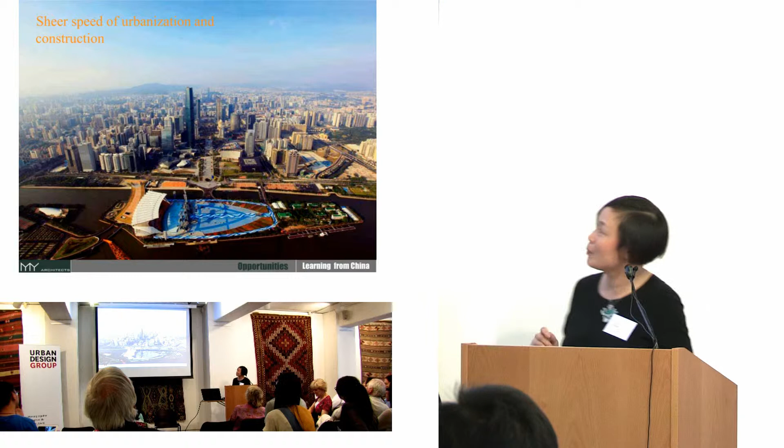The Chinese built their towns with extraordinary speed. This is the new town in Guangzhou. Imagine there's nothing there 10 years ago. Now everything has happened. There's a central district with skyscrapers, an opera house, a city museum, and the central libraries.

Before I talk about the planning process, I will mention two fundamental differences in China. The first one is land ownership, because in China most of the land was owned by the state, and a very small portion owned collectively. The land users only have a right to use the land, not own the land. This is very different. For instance, for residential development it's only 70 years, but other uses are only 40 to 50 years.

The second one is the decision maker. Because of the land ownership, you'll find in most cases it's the government that plays a very important role in terms of project decision making.

There are three planning policies at different levels. The first one is a regional plan. It deals with the strategic vision on a very large regional basis. The second one is a strategic master plan, normally for a small city, a town, or even a district in a metropolitan area. The third one is called the regulatory plan.

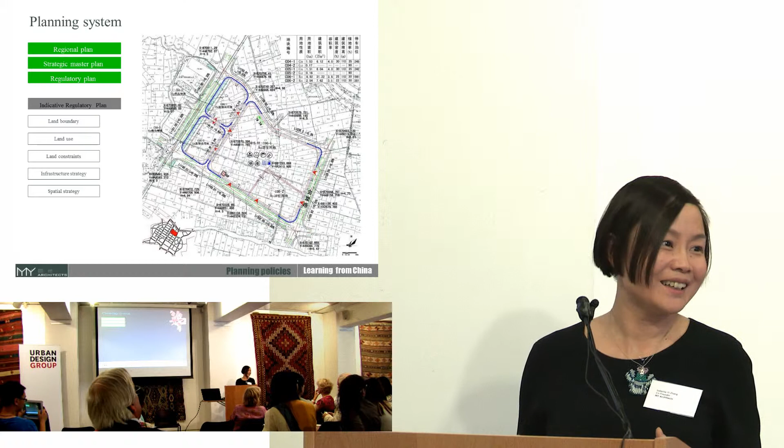It's very different in terms of how planners work here. Here in the UK, architects will do a context study and then test the land. But in China, the plan is set up in very detailed terms. This forms a development guidance for the following design projects.

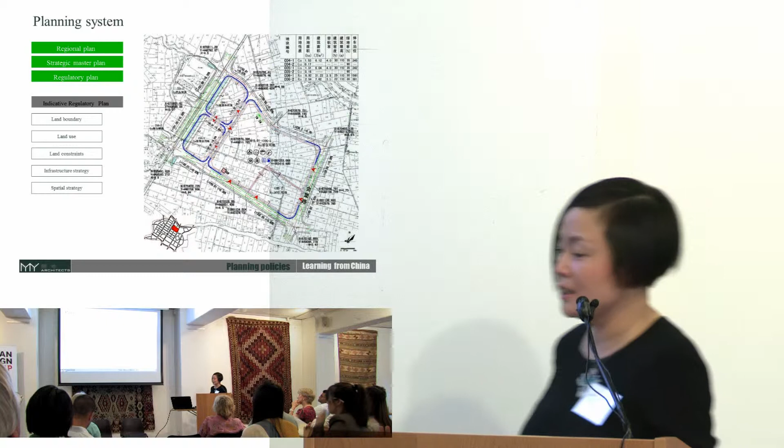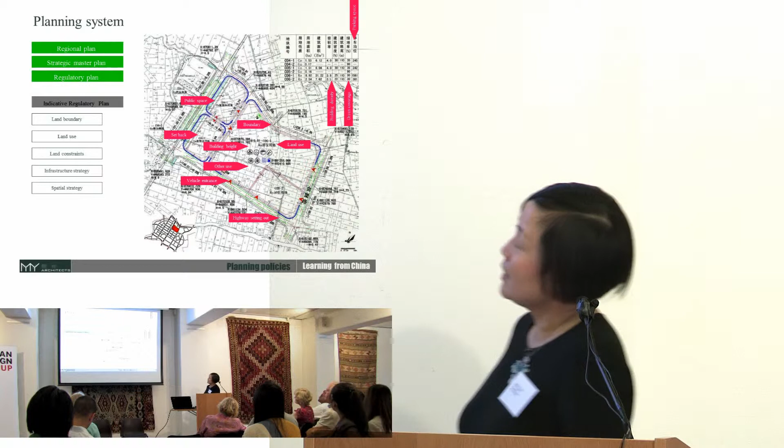There are two regulatory plans. The first one is called the indicative regulatory plan. You'll find these drawings normally done by the local authorities. It's set up in detail in terms of site constraints, land boundary, land use, and even how much you can build on the site, the density, and the building and green coverage.

So the next one is the construction regulatory plan. It includes the construction documents for the infrastructure and the services. So it will be something like that.

So we talked about how the regulatory plans form guidelines for the design projects, and the client can still apply for a change in terms of numbers. When you talk about numbers, it's very sensitive because it affects the land value and also the profit margin for the development. But the plan for change is a bit tricky actually. In most cases, it's not successful.

So the working stage is very similar to RIBA work stages here. You'll find that you probably need 3 applications: planning application, design development application, and construction approval. Under law, no building works should be carried out until construction approval, but sometimes you find the groundworks already commenced, together with the conceptual master plan. The planning and architecture practice will normally carry this out in China.

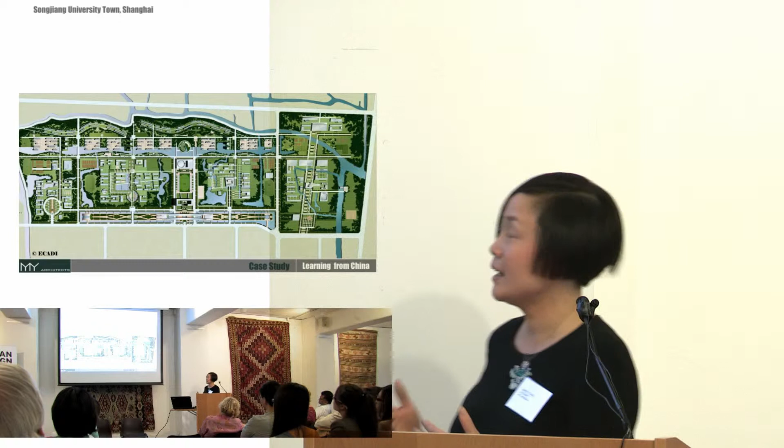I'll talk about some case studies. This is Songjiang University Town, Shanghai. I was working on this as a project architect back in 2000 with East China Architecture Design Institute. This followed a competition route. Our team with German architects won the competition. This is the master plan we prepared for the regulatory master plan. You can see.

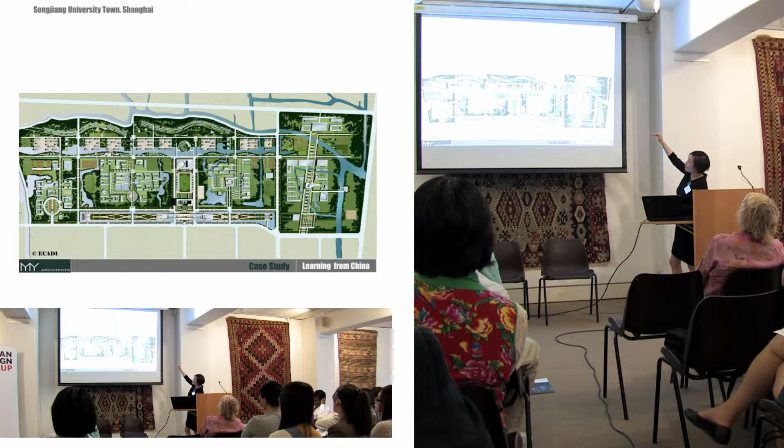You can see there are 4 universities sitting orthogonally from west to east, and there's a central zone to show shared facilities like the stadium and central library. The student accommodations sit on the north of the small river, and the teaching units sit on the south of it. There's a linear park that forms open space for the whole universities.

Here's the teaching quarter. You see the library take the center stage of the entrance square where the teaching units are surrounded by it. There are some CGIs showing how the subjective architecture will be in the planning document.

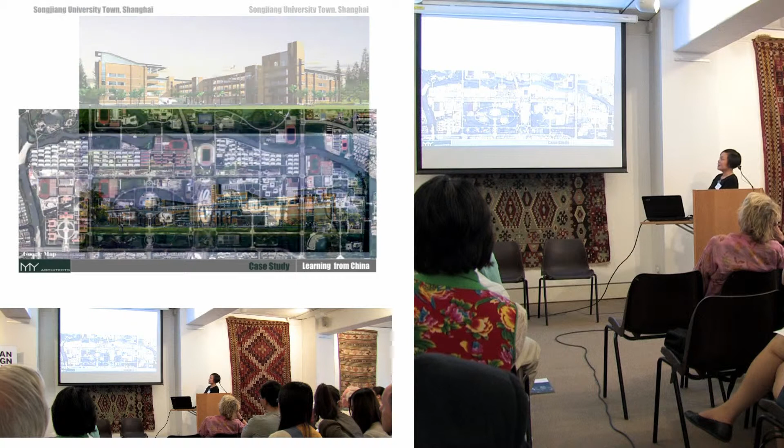The master plan was done very quickly and on time, and the client is really, really happy. Then the local authority took over the rest of the work, so they commissioned other architects to do the design work. It was built very quickly because the competition started in February, and the first stage of the university opened the year later in September. So it's very, very fast.

I haven't walked back to the campus since I left the country, but I sometimes see this become a TV set, so I'm not very impressed.

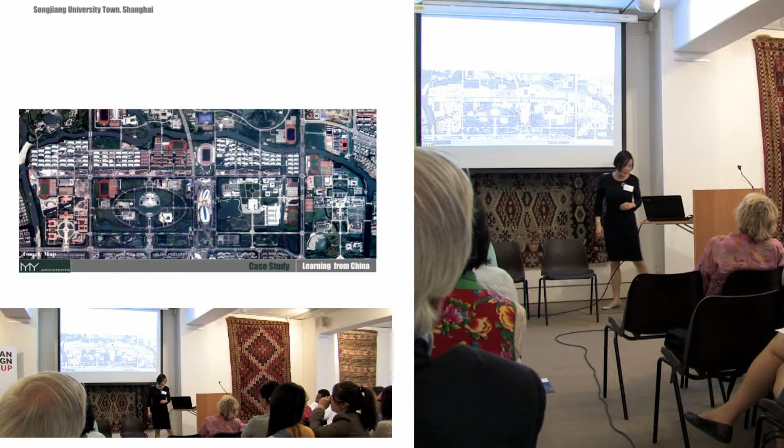You can see this area recently, and the whole framework still keeps to the original master plan. You see very clearly where the four universities are, where the student accommodation is, where the teaching units are. But I found that the development in each campus actually didn't follow the original plan, especially this one. The second from the left seems very ill-fit to the rest of the universities, and it's lost the scale - it's massive scale with a bizarre road network.

I was later told that the university changed hands, so the client must have had a new brief, and the regulatory plans failed to enforce.

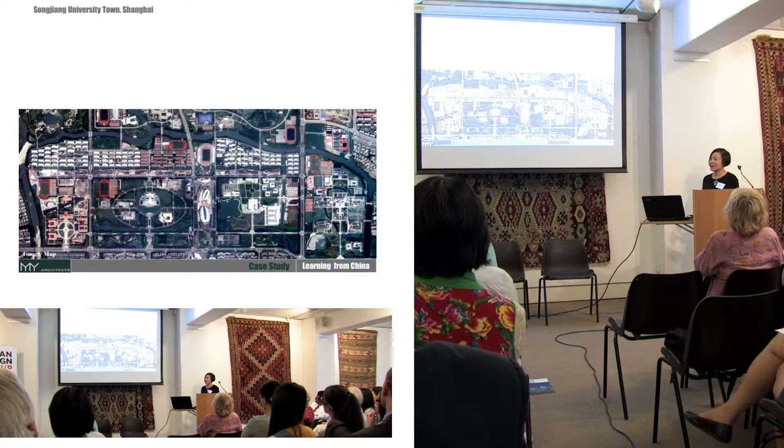I'll show you some of the architecture here from the universities - some contemporary, some they say Chinese, very European style.

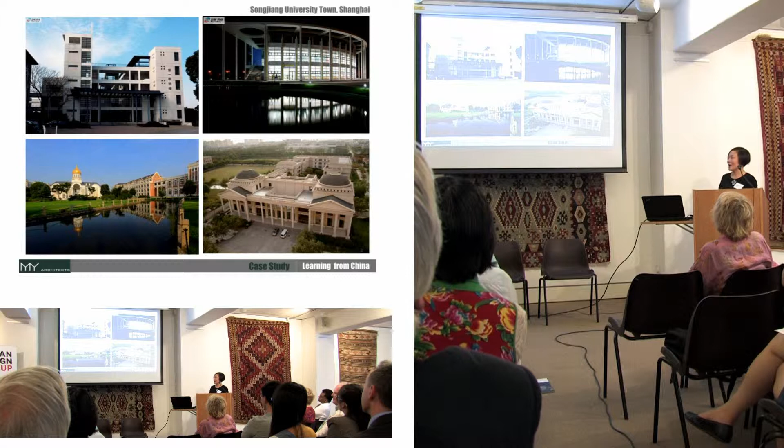Okay, that's what happens. I was told this is actually for the University of International Studies, because the vice mayor at that time came up with the idea that each building should have a given identity that can reflect the style of different countries. So you'll see buildings for Middle East studies and other area studies. That's actually quite a good project to reflect how the master plan will be developed in China.

You see the policies actually give the client certain freedom to develop in detail, and the question is how architects can use this opportunity to enhance the plans. You see the government has a strong influence on the decision maker - how can architects actually convince the client to keep the project on the right track.

Second project - the following two projects are architectural projects. I worked as a project manager with MJP, and I'm very grateful MJP let me use this as samples. I started exploring the China market back in 2010. This is the first competition we did.

In China, most state-funded projects will go through the competition route. It's a paid competition, by the way, which is good, and it normally gives only 7 weeks to develop. There's a professional jury to judge each scheme. They normally choose 2 for the finals, and the client will normally commission one of them.

So this is the museum in Yangzhou. Yangzhou is actually quite a heritage city - you see our site on the upper right, the little red dot. It's next to a beautiful conservation area, and the city itself is dotted with very beautiful Chinese gardens.

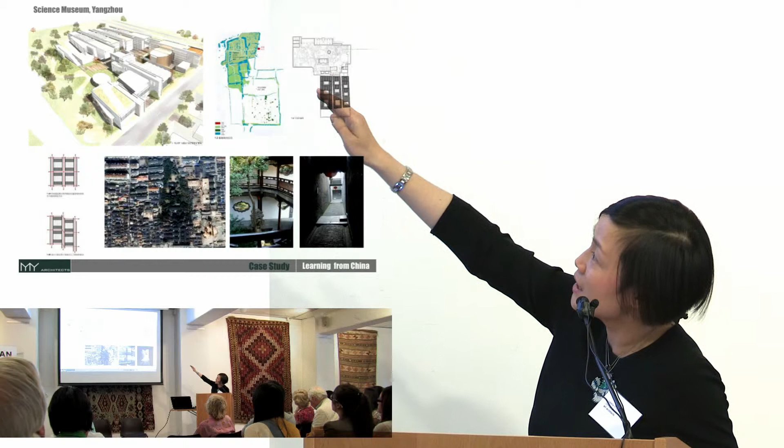The concept comes from the unique ways walls were articulated in Chinese gardens to create a dramatic space. We used the wall to form the grid, and the building was loosely woven into it.

I also want to talk about the CGIs for the competitions. For competitions in China, actually the submission requirement is quite high - they ask for several CGIs, physical models, and sometimes films and multimedia PowerPoint presentations.

Our models and CGIs were made in China for cost reasons. There are quite several good CGI artists in China - they provide very good service, very reliable, punctual. But with model makers you have to be cautious, because you have to monitor day by day, as they sometimes misinterpret the architectural drawings and get things wrong.

The printing and binding service is outstanding in China - they're open 24 hours a day. So when you rush for the submission, you have to rush for it on time, and you'll get it done.

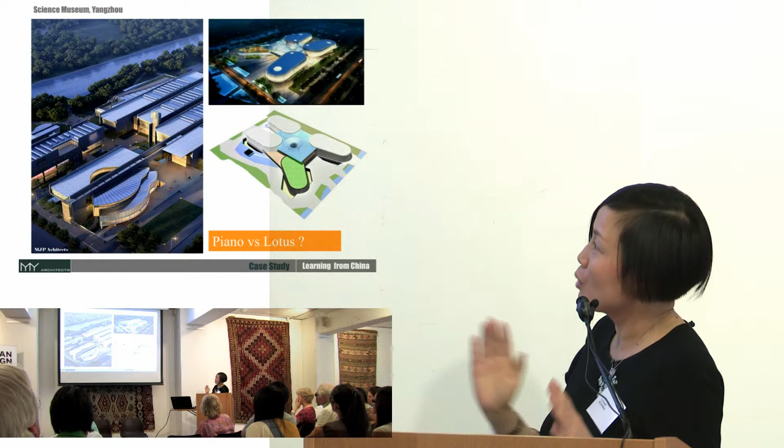You can see there's a very different approach these two schemes take. The Lotus is a concept the Japanese architect gave to their scheme. They said their building looks like a lotus. However, the judges think lotus may not quite relate to the Yangzhou city.

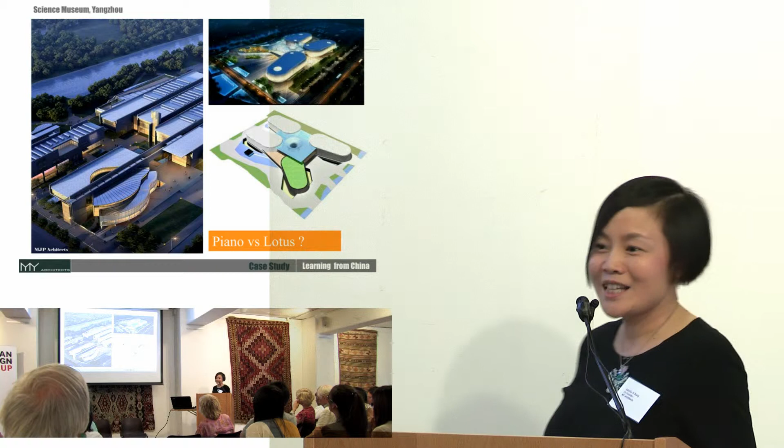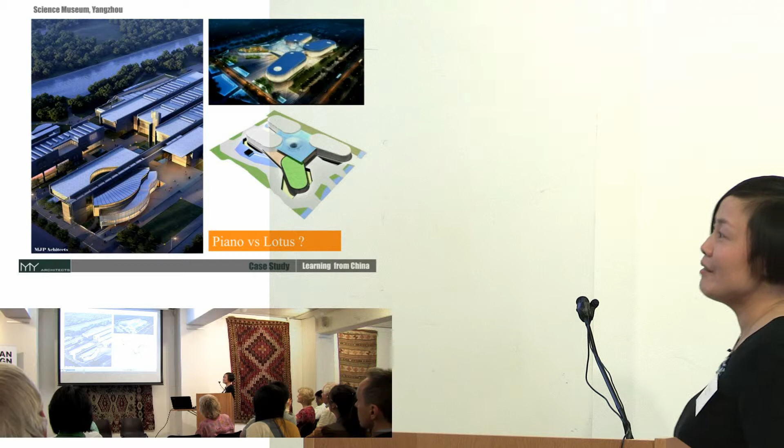But the Piano scheme, it's quite interesting, we found out later it's what the client invented for the public inquiry. I understand it's well intended. They might think a building has to look like something to be understood in China. So that's very interesting, how the general public perceive a piece of architecture in China.

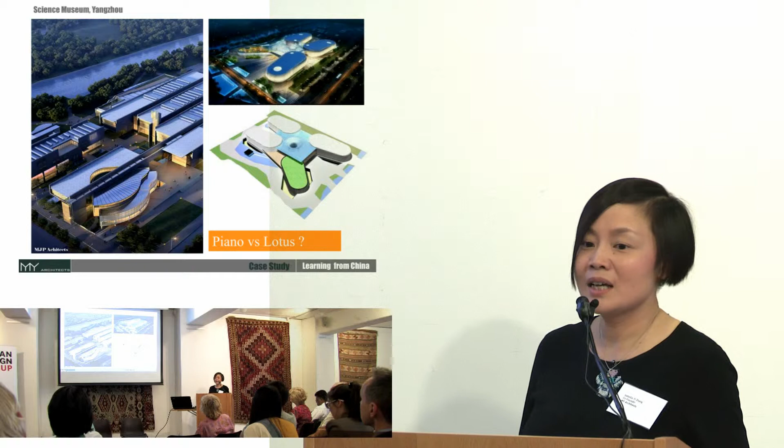The mayor, at the end, likes the lotus, so the client had to buy it. So we didn't win in the end. Another important reason is the Japanese firm had one project done in China before, but nonetheless it's quite a success to get onto the ladder in the Chinese market for the practice.

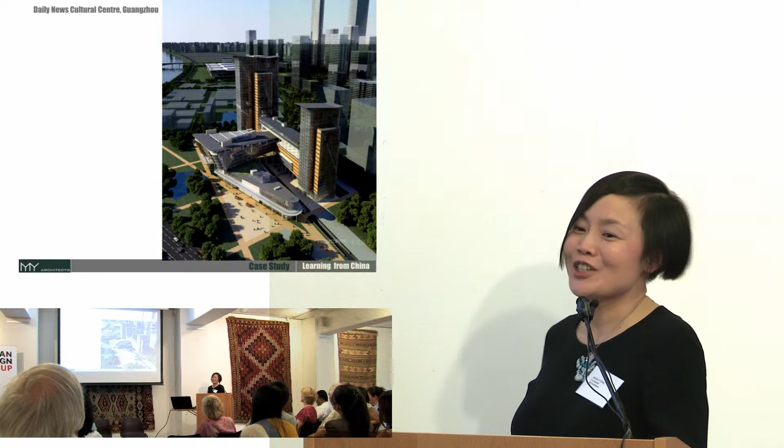So the next year, 2011, I came across this competition, the Daily News Cultural Centre in Guangzhou. This is a very high-end competition with very good fees, just in the limelight, and the client in the media, you got very good publicity. Because of our previous work done in China, we made a very successful bidding, so we got shortlisted with other well-known big international architects. I think Farrell is one of them.

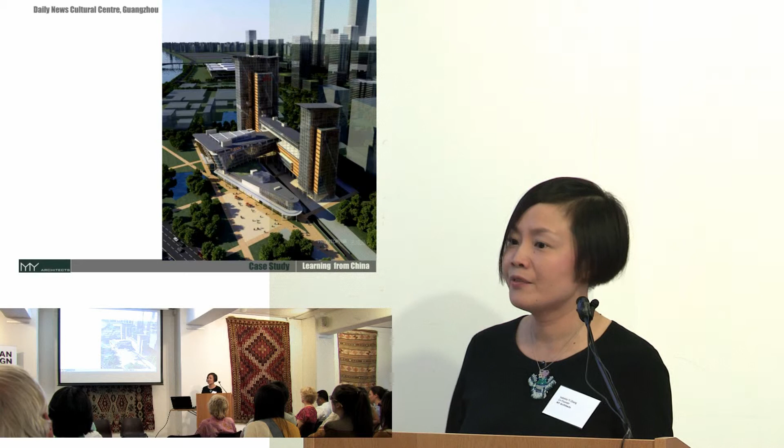In the brief meeting, very interestingly, the client stressed that they want a very simple, sophisticated building, but not like the Opera House opposite the Pearl River. So what's wrong with the Opera House? That's the Opera House, known like two pebbles. It's very dynamic, it contours the landscape, linking the Central Boulevard with the riverside. I quite like it, the internal space is very beautiful and dramatic, I would say.

But it comes with a very big price tag. The original budget was 850 million Chinese yuan, and when the final cost was revealed, it had risen to 1.38 billion, which caused a big public stir.

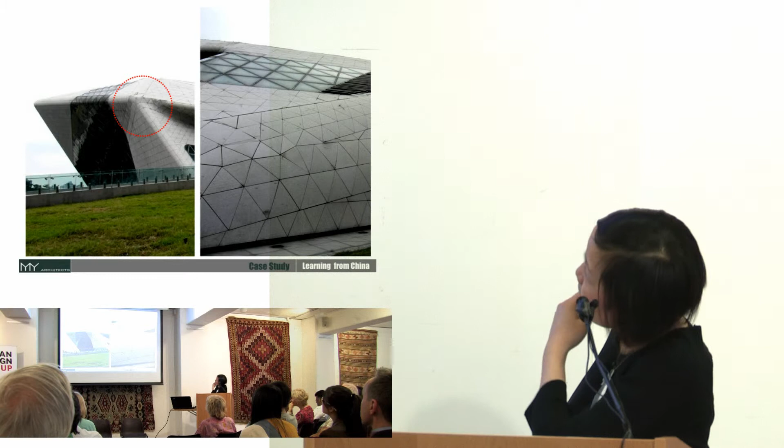And I'll show you some photos. You can see some defects in the cladding on this picture, and more details on the sides. You can tell the subcontractor didn't do the proper work here. They probably hadn't got the experience to work on such a complicated building before, and they really struggled.

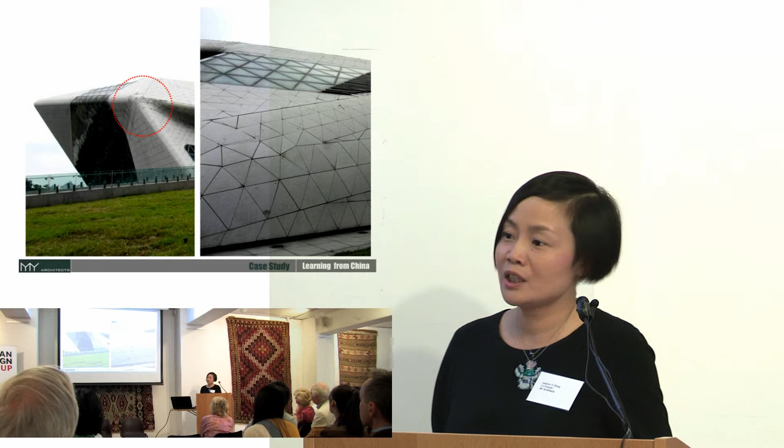In China, material and workmanship is not good, no way near here, because I work on most of the China projects. I found most of the materials haven't got the certificate and haven't got even the information data. So if you work in China, architects have to be very cautious about the choice of materials, what is available, and what kind of skill level they have.

The other problem is the procurement. I would say most of the Chinese projects take the procurement back in the UK is like a design-build contract here, so the level of international architects' involvement after tender can be quite limited. So if you work in China and the building will carry your name, make sure you have a certain level of control into the construction stage.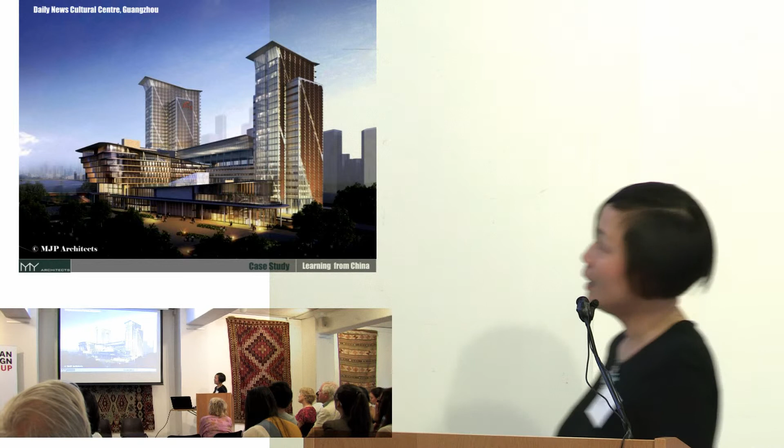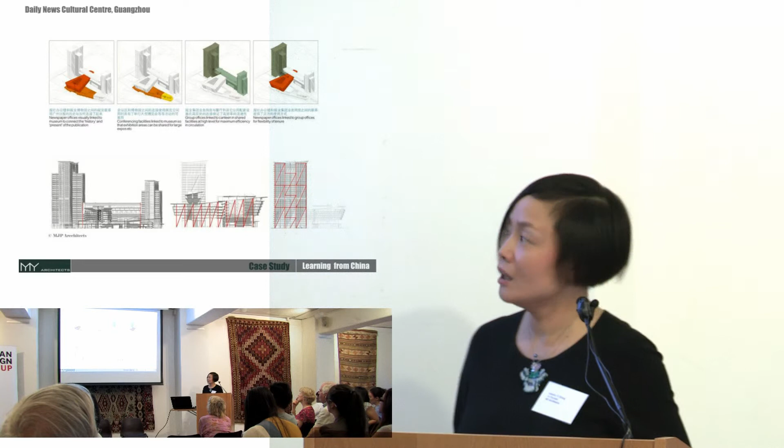So let's go back to the Daily News Center. This time the client likes it, and it's among their favorites, but the jury didn't like it. The reason is, from the mega structure they mentioned, they worry about the cost of the structure, which can let the project go wrong in terms of the budget.

But somehow it's a quite good experience for MJP in terms of the marketing point of view, because the scheme was published in the media, on the telly, and online in the newspaper. And because of these two projects, later another Chinese developer was brought in, and he was convinced that these two projects could lead MJP to work on other Chinese projects, and they'll have their first project done in China this year, hopefully.

So, in conclusion, China offers a great opportunity for architects, for foreign firms. They like contributions from all over the world for their urbanization. The opportunities are huge, and they come with challenges as well, including cultural differences, the planning process, materials, skills, and sometimes even communication. I guess if you work in China, you have to make the most of the positives to achieve your goal.